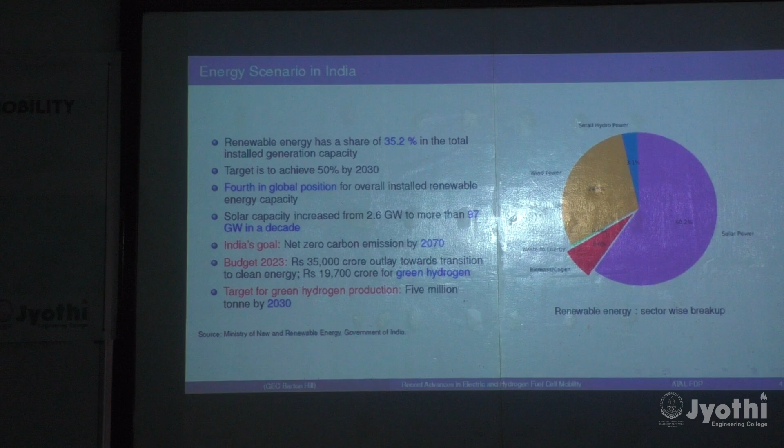So the issue with solar as well as wind is that these are not continuous sources of supply. These are transient. Day-wise variation will be there. Morning to evening variation will be there, as well as yearly variation. At night it will not be available. In the case of wind, we cannot predict when we will get higher power. All those things we cannot predict. So if we plan to shift to renewable sources by 2070, we have to find a mechanism to store energy. That is where the concept of green hydrogen has importance.

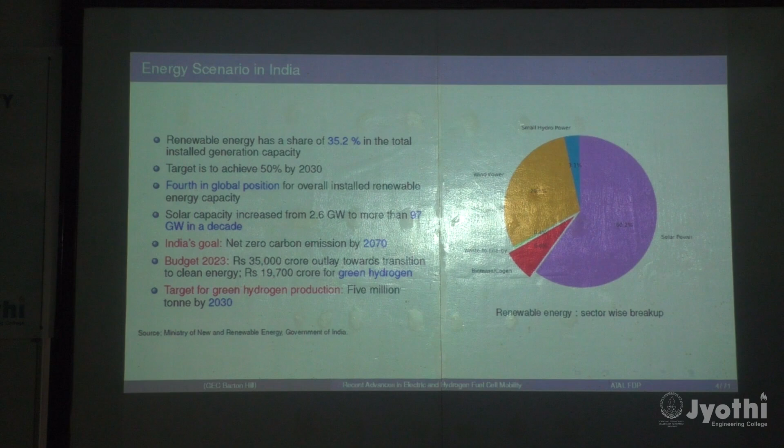It may be very difficult to make batteries of gigawatts capacity. We are talking about gigawatts here. So there are other alternatives like gravitational energy storage systems. Another feasible approach is to produce hydrogen using the excess electricity. Whenever there is excess production of electricity, store that hydrogen, and whenever there is a shortage of power generation, use the hydrogen to produce power. So that is the method in which we will be using hydrogen as a storage medium.

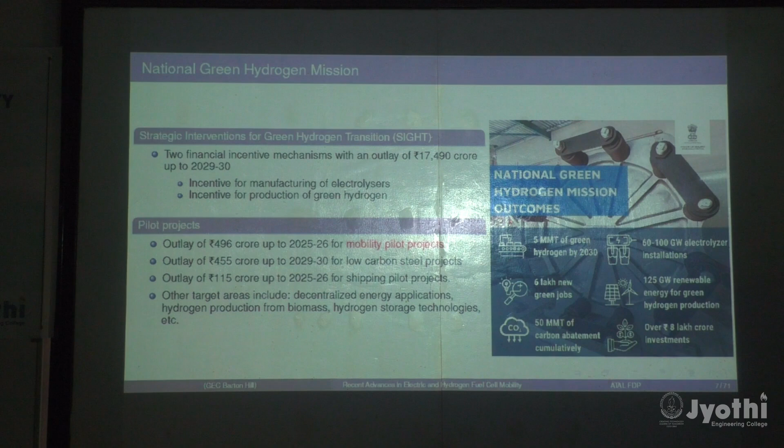Another one is energy carrier. So we can store hydrogen; we can generate it at one location and transport it to another location. If you look at solar power plants, these need a lot of land. So acres of land are required. So in towns it is not possible to install a solar power station. So what we'll do is generate the power somewhere else, generate hydrogen, and bring it to the location where we want to use it. So we can use it as an energy carrier medium.

So green hydrogen: there is electrolysis as well as production of green hydrogen. Hydrogen can be produced using equipment called an electrolyzer. This is just the opposite of fuel cells. In a fuel cell we use hydrogen to produce electricity. In an electrolyzer we use electricity and produce hydrogen.

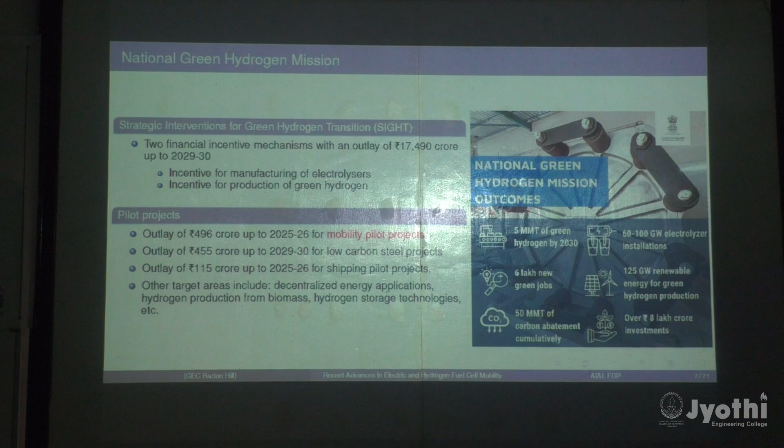So if you want to convert a lot of energy, gigawatts of energy, to hydrogen and store it, we need that much bigger electrolyzers. So there is a lot of research happening on how to develop big electrolyzers, and also how to produce green hydrogen. So in these two areas a lot of research is going to happen.

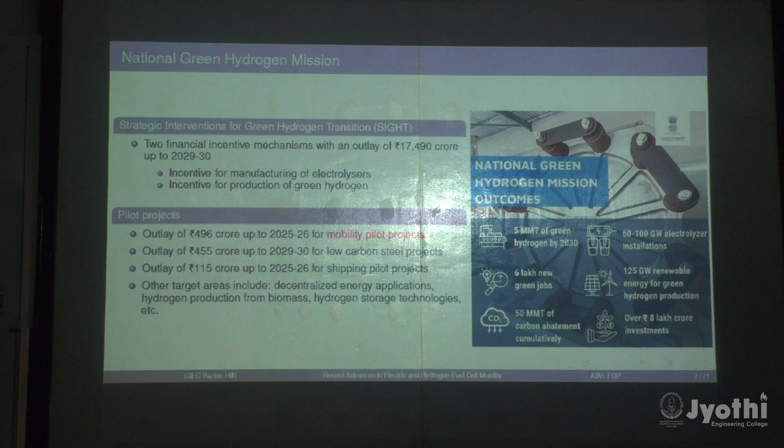Then pilot projects are in the mobility sector. Then low carbon steel production. Steel production is another area where a lot of carbon emissions are happening, so there they want to reduce emissions, and a transition to renewable energies is required. Shipping projects.

Then other things are decentralized energy applications, and hydrogen production not only from renewables but from biomass also. Then hydrogen storage technologies. We are generating hydrogen; how to store that hydrogen? That is another big challenge.

And we are planning something like 5 million metric tons of green hydrogen by 2030, and 60 to 100 gigawatts of electrolyzer installations by 2030. Then a lot of new job opportunities are coming up, so it is like a new market coming up. Then 125 gigawatts of renewable energy for green hydrogen production; we'll be using that much capacity, transferring that much electricity to green hydrogen. Then a lot of investments are also expected.

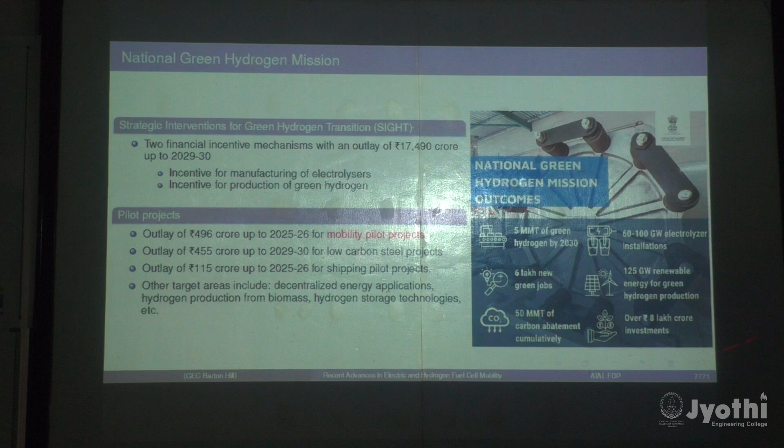And recent developments in this mission mode: the first point, the transport sector. Whatever they planned in the transport sector has materialized. In November 2024, the first hydrogen fuel cell vehicle was commissioned. This was done by NTPC, National Thermal Power Corporation, in Leh, Ladakh. They also plan to operate some 5 hydrogen fuel cell buses.

And there is also a hydrogen fueling facility. Just like our petrol pump or diesel pump, a hydrogen fueling station is also installed there. So that is another important thing. Along with the transition to a hydrogen economy, we need hydrogen fueling stations also.

The project has a dedicated solar plant of 1.7 megawatts for providing renewable power for producing hydrogen. From that solar plant, we will first generate electricity. Using that electricity, we will produce hydrogen, store that hydrogen, and use it for running the buses. That is the plan. This was already commissioned in November 2024.

Another major step is 8th January 2025. In Andhra Pradesh, there is the first green hydrogen hub with 20 gigawatts of renewable energy capacity. They are planning to produce 1,500 tons per day of green hydrogen and other derivatives as well.

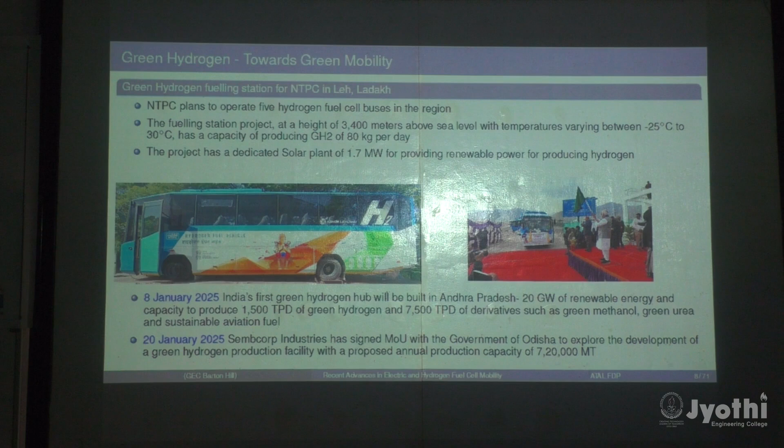In hydrogen we have chemical energy, and this chemical energy is directly converted into electricity. There are no intermediate steps. The chemical energy of hydrogen is directly converted to electricity, so there are no losses in between, and it will continuously produce electricity as long as we are supplying the reactants.

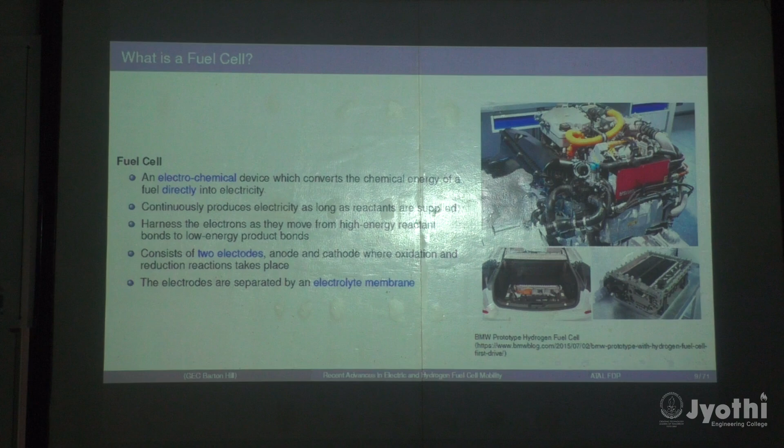If we are using a battery, it may get discharged. But in a fuel cell, as long as you keep supplying the reactants, that is hydrogen and oxygen, it will keep on producing. In an engine it is directly happening: we are supplying hydrogen fuel and oxygen, and both are burning in a single space. But in the fuel cell, this is happening over an extended length. So that is the advantage.

So basically every fuel cell must possess two electrodes separated by an electrolyte. So this is the fundamental difference between directly burning hydrogen and using the hydrogen in a fuel cell. Is there any doubt regarding any of these aspects? So this is the basic working.

Then we'll just compare battery electric vehicles and fuel cell electric vehicles. Fuel cells are still not developed to the point that we can directly connect a fuel cell to a motor. Because when we are driving a vehicle, there will be acceleration as well as deceleration. So the fuel cell has not evolved to take that load change. Still we'll be using some battery. But currently in the market we have battery electric vehicles. Fuel cell vehicles are also there, but they are in the testing stage.

So a battery vehicle contains a large battery to store the electricity. Usually there will be an onboard charger to convert AC electricity to DC power. There will be an electric motor to propel the car using that energy from the battery. Mostly we will be using lithium ion batteries. That is the industry standard nowadays. And the longest range battery vehicle is the Lucid Air Dream Edition, 505 miles we are getting.

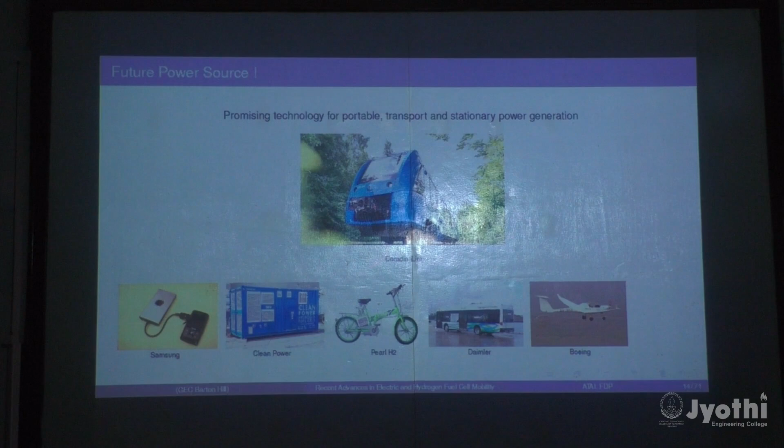And another advantage of fuel cells is that they can be used for different applications, from very low power applications like mobile phones to standalone power systems, the mobility sector, even one aircraft is there flying using fuel cells, then trains. So from mobile phones to trains, we can develop these fuel cells as per our requirement.

So this first part summary, what is the need for fuel cells? As I mentioned, we have a transition to renewable energy that is happening, and in this the predominant sector is solar as well as wind, and both are intermittent. We cannot predict the availability of wind or solar, and at night time solar is not available. So how to store this energy? Excess energy will be produced. How to store that excess energy so that we can use it when power is low, or renewable outputs are low? So that is one of the key aspects.

We'll be generating hydrogen and storing it, and later we'll be using that hydrogen in a fuel cell to generate electricity. So in this key step, fuel cells are required. And another aspect is efficiency of conversion and environmental considerations. As I mentioned, the chemical energy of fuel is directly converted into electricity. There is no CO2 generation. The only direct output is water. So water as well as heat.

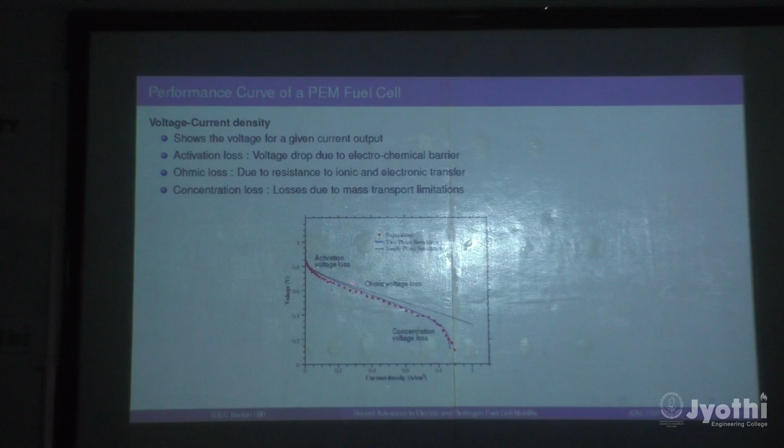And this is a performance curve of a fuel cell. This is nothing but a voltage versus current density curve. Theoretically we can get something like 1.23 volt. But if you do an experiment, this red dot shows the experimental values, we may be getting a much lower value. We will not get 1.23. There will be several losses and imperfections in manufacturing, so there is a drop. Our open circuit voltage will be around 0.99. This is at zero current, open circuit voltage.

Once you start drawing current, once you start increasing the current output, what will happen? There will initially be activation voltage loss. We want to start the reactions, so there is an activation barrier. To overcome this activation barrier, some energy will be lost. That is taken into account by the activation voltage part. This is an exponential reduction in voltage.

Then we can see an almost linear drop in voltage. This is ohmic voltage loss because of the electrical resistance of the components. In the medium current density region, we have ohmic voltage loss. So if you are getting 0.6 amps per centimeter square current density, you can get around 0.45 volt. So voltage keeps on decreasing as you increase the current output.

Then finally, if we go to the higher current density regions, what will happen? There is another parameter called concentration voltage loss. At higher current densities, the reactions are taking place at a very high rate, and we need to supply the reactants to match that rate. Reactant supply should be at a very high rate so that these reactions can sustain.

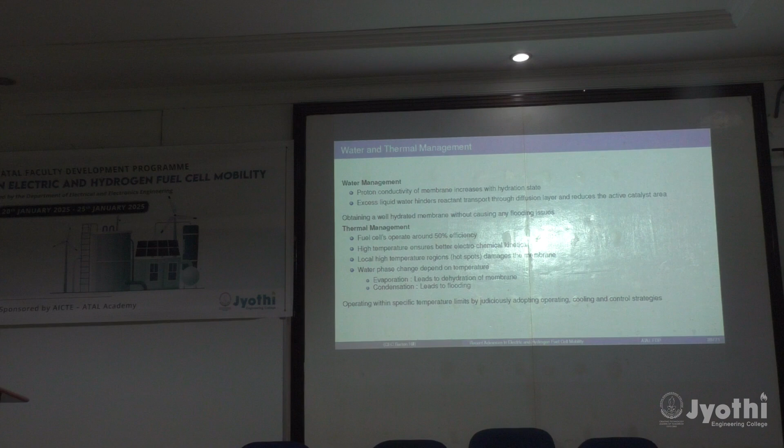Then thermal management. A fuel cell typically operates around 50% efficiency. Theoretically it can have 80% efficiency, but in the actual practical case it may be operating at 50%. So the rest 50% is lost as heat. So a fuel cell will be generating a lot of heat, and this heat will increase the temperature of the components.

We want the components to operate at a safe temperature limit, 80 degrees Celsius for this particular membrane. If the temperature goes above, say, 100 degrees Celsius, the membrane will get damaged. It will degrade the membrane, catalyst layer, everything will degrade.

So we want to keep the temperature of the fuel cell in a safe limit. That is called thermal management. So we want to cool the fuel cell simultaneously. So for cooling, we generally use the reactant itself. We will supply excess reactant. At a particular reaction rate, we can calculate the amount of hydrogen and oxygen required. So we will supply excess hydrogen and excess oxygen, so that the excess reactant will cool the fuel cell.

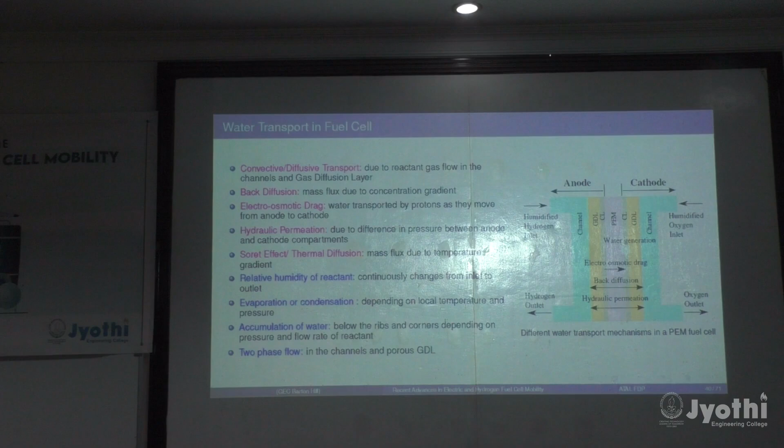Then because of temperature difference, there could be water transport. So there are different methods of water transport inside the fuel cell, and each we have to consider and optimize. We want our membrane to be properly hydrated, but we don't want excess water anywhere here. Excess water will hinder the reactant transport. Other parameters of consideration are the relative humidity of the reactant.

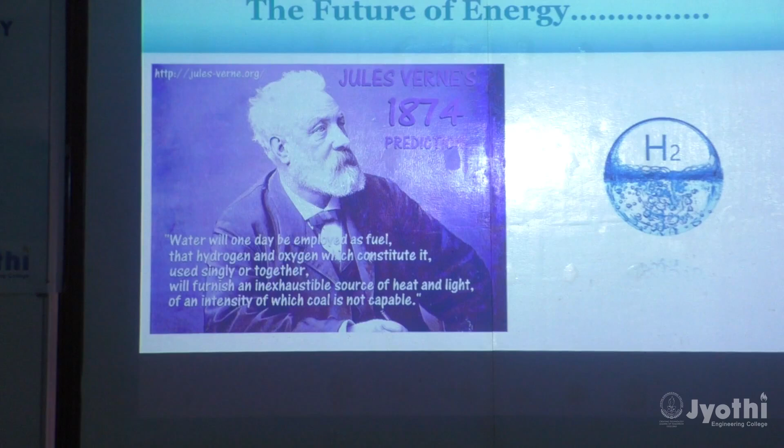Okay, so there's a reason why this hydrogen is going to rule the world. Just some very basic things regarding this hydrogen. This is a very pressing need to transition. We need a very intensive transition, not a simple transition. A very intensive transition is necessary.

As we move away from fossil fuels, renewable energy sources are gaining momentum. Among these, many renewable things are there, but green hydrogen emerges as a promising solution. As we are moving towards the net zero target, hydrogen is giving a promising solution, offering a clean and versatile energy carrier. I would like to repeat and emphasize that sentence: clean and versatile energy carrier.

That sentence is what makes hydrogen different. It is not simply energy. It is an energy carrier. That is entirely different. This gives the versatility of hydrogen. We can see how this is becoming a good carrier. Just think, it is not an energy source, so we can carry this source in different forms. With the potential to revolutionize, that is the reason somebody is claiming that we can revolutionize various sectors by using this hydrogen.

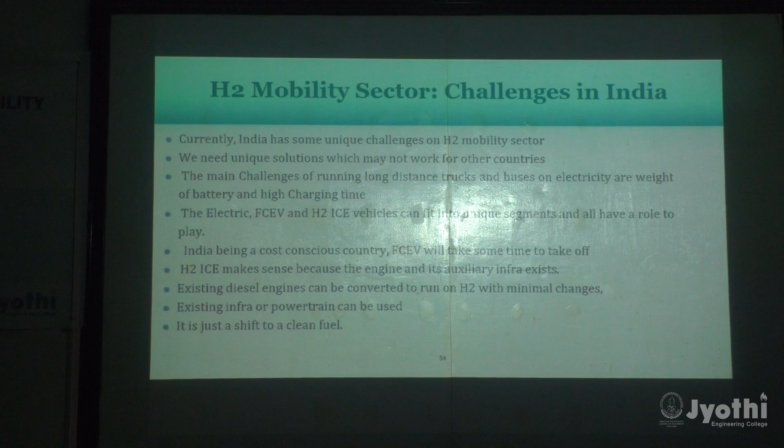Existing diesel engines can be converted to run on H2 with minimal changes. Hydrogen production plants are one side, and on another side, fuel cell electric vehicles need new infrastructure, new technology, while diesel vehicles and trucks are already there. Thousands of crores are already allocated in the budget for the green hydrogen policy.

As of March 2024, 6 Indian states, including Maharashtra, Uttar Pradesh, Andhra Pradesh, Rajasthan, Odisha, and West Bengal, have released their green hydrogen policy. Kerala's policy is not in the pipeline, it has already been completed. In the previous week, the draft was completed, and most probably by next month Kerala's green hydrogen policy will be released. So these are the green hydrogen milestones of the government of India.

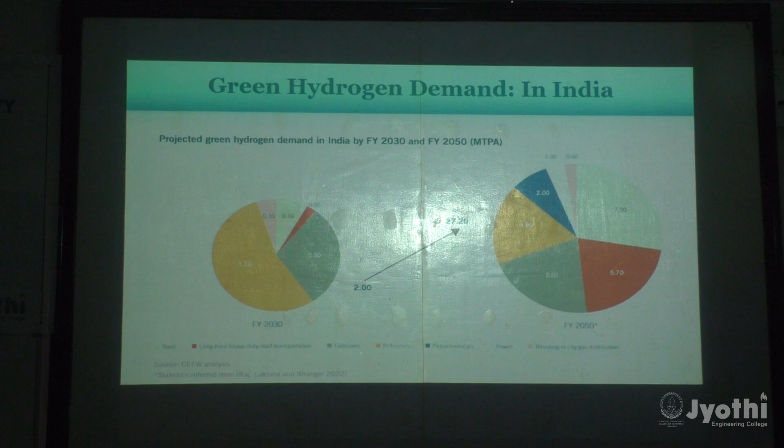This is about the green hydrogen demand. The present demand is 2 million tons per annum, and it may be 27 in 2050, in the different sectors that are shown.

Another one is very important: enabling an ecosystem.

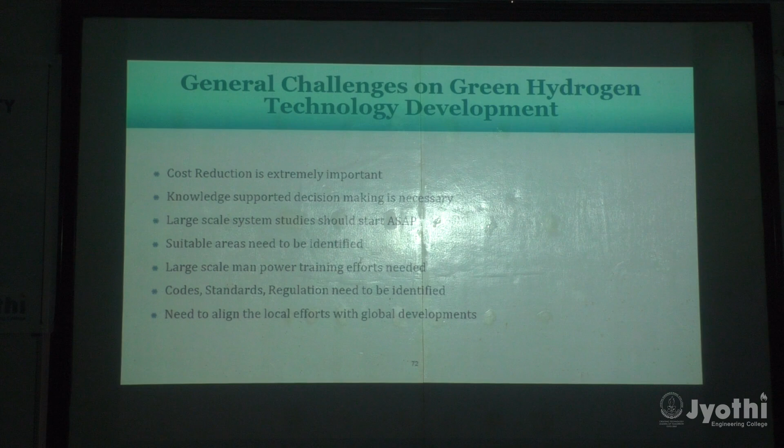Large-scale system studies, suitable areas to be identified, codes and standards, and this is the reason why there are a lot of opportunities in front of you people.

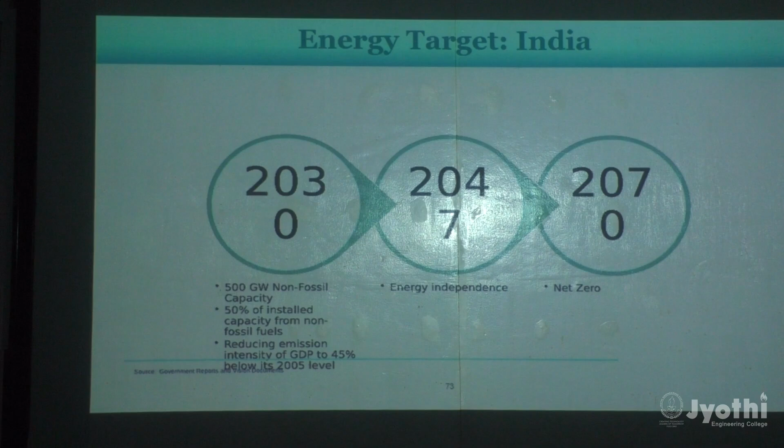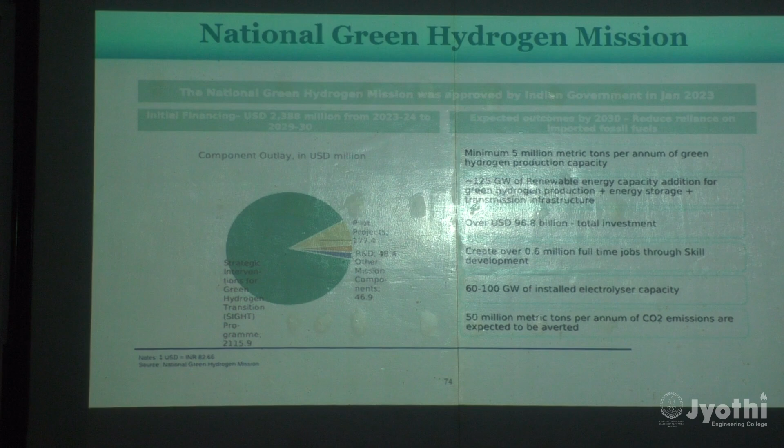2070 net zero. And these are all the national green hydrogen mission activities. Has it been discussed in the previous sessions? Yes. I will go through some activities in Kerala. So the net zero vision of Kerala. These visions and policies are developed under the Ministry of Power and ANERT.

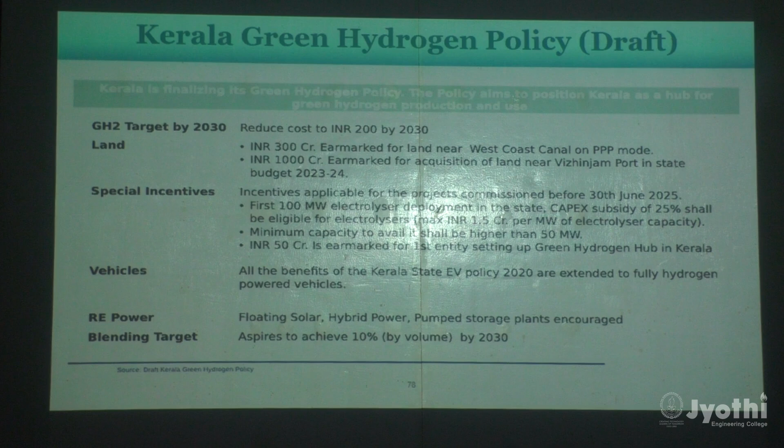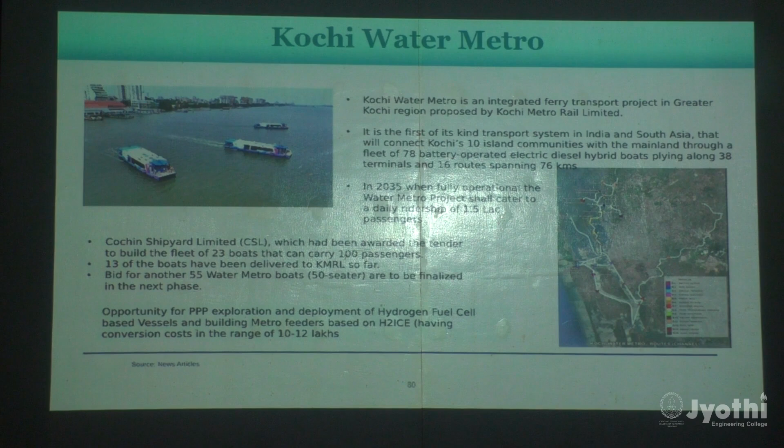Have you heard about the Kochi Water Metro? There is a hydrogen boat. Yes. So the hydrogen boat is already commissioned, and another one is under construction. And a lot of initiatives are there in green hydrogen under CSL.